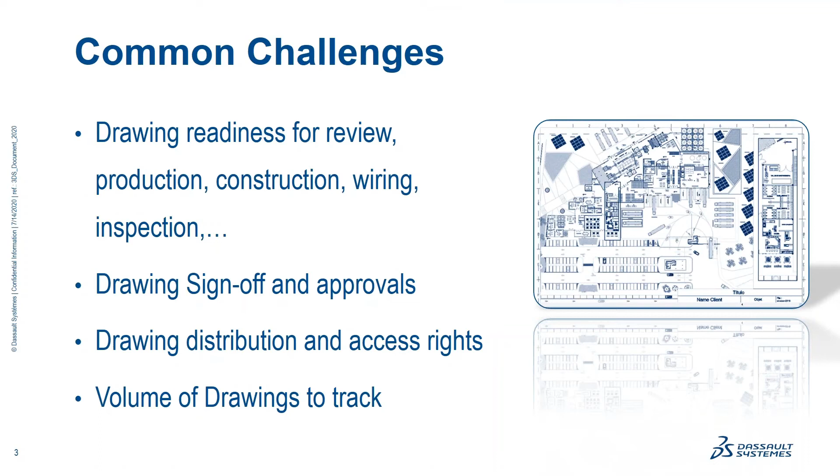And with that come processes that center around sign-off and approvals, as well as the distribution of drawings and associated access rights. And what we've learned over the years, being at the forefront of design tools and applications in the industry here at SolidWorks and Dassault Systèmes, is that the volume of drawings to track is, for most of our customers, pretty sizable. And that's a problem that we are attempting to solve. And with that, we're bringing together people across an organization, data, as well as it relates to design, some ideas.

And our 3DEXPERIENCE platform, a cloud solution, is uniquely positioned and purpose-built to make that happen, to bring together unstructured collaboration as well as structured collaboration methodologies where many people in an organization can come together and share information seamlessly through technologies such as cloud file sharing, similar to what you might be using today in some cases, but also combining that with the ability to dashboard information, to leverage communications through communities. That's all unstructured. And we have, as you'll see today, some solutions to offer to address some of the challenges that might come with that.

But with drawings, as it relates to sign-off and approvals, there's also a very structured element to it. And here we also will show you today some capabilities around lifecycle management of DWG design files, task management, all the way to project plans, and show you how you can leverage the two technologies here, Draftsight and 3DEXPERIENCE platform, to bring these two domains of data management and design in drawings nicely together.

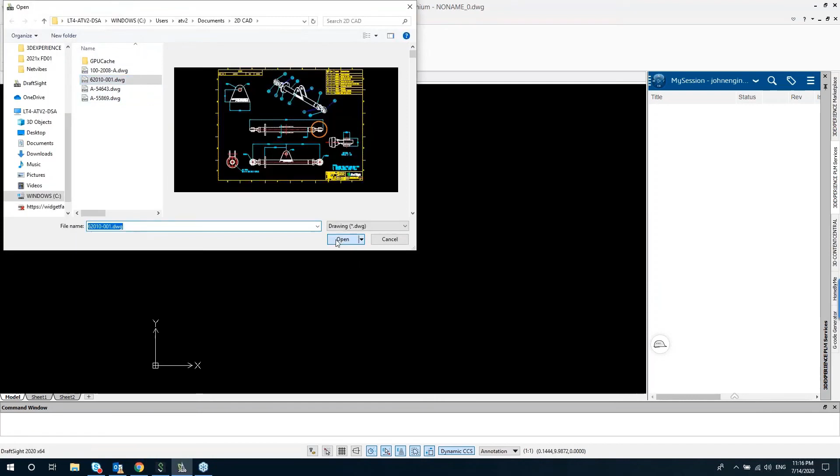Loaded beautifully in Draftsight. And now let's take a look at the 3DEXPERIENCE task pane on the right side of the screen. I'm going to expand it so it's a little bit easier to see for everyone. And here, as soon as we open a drawing in Draftsight, the platform is able to see and recognize that we're working on a particular drawing on a DWG.

Few things to point out. We can see what the title of the drawing is. We can see its current status. And in this case, currently it is not synced and not stored on the 3DEXPERIENCE platform. We can see which revision we're working on and if this is the latest version that's available on the cloud.

So to get started, the first thing that I'd like to do is show you the various options that are available when managing a drawing on the platform. So of course, if you have a drawing saved, you can open it directly from the platform into Draftsight. We can save it, which we'll do in a moment. We can also reserve it to make sure that no one else is working on a drawing that we are working on. And as soon as we finish making any changes, we can unreserve it.

We can make sure we're working on the latest copy by reloading it from the server and also replacing it by a revision if we're working on a different one. We can control the maturity of a drawing and create a new revision of this specific drawing directly through the Draftsight interface. So first, let's save the drawing so it's available on the platform.

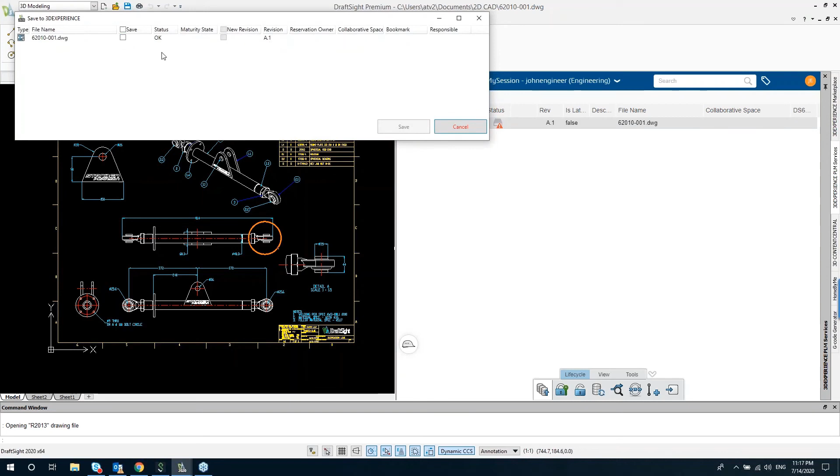We can verify that the status of the drawing is okay. We're saving revision A1. We'll check and click Save. The drawing is automatically saved and uploaded to the platform and available to all other users. We can see that the status of the drawing has been updated automatically, and the drawing is currently not reserved, so it's available for anyone else on the engineering team to open in Draftsight and start to work on it.

Now, I'd like to review what maturity state this specific drawing is in. So by right-clicking and going to maturity, we can see what state this drawing is in. And this is the workflow that's available by default, but it can be customized to suit your specific needs. So currently, the drawing is in work. We can freeze it, or we can release it if we have finished making changes to this drawing. So let's release it.

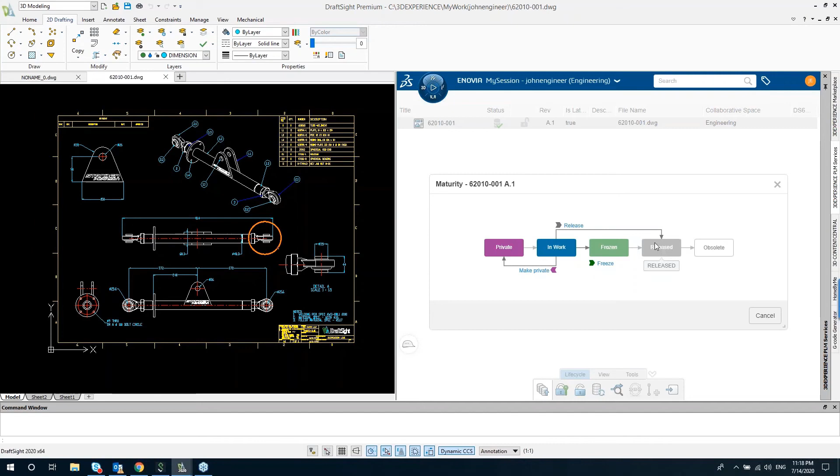By simply clicking, the drawing is automatically released. We'll get a notification that the maturity of this particular drawing has been updated, and this is the latest version being saved to the 3DEXPERIENCE platform.

Now, what happens if we make a change to a released drawing? So really quickly, I'll go into Draftsight and I'll just change one of the colors for the layers that I have. So we'll choose the dimensions. Currently they're cyan. We will change them to green. I'll save this locally.

And as soon as we've changed the drawing and saved it locally, you'll notice that the status has changed because now we are not working on the latest version of the drawing that has been saved to the 3DEXPERIENCE platform. So we'd like to save our new version, the one with the green dimensions, to the platform.

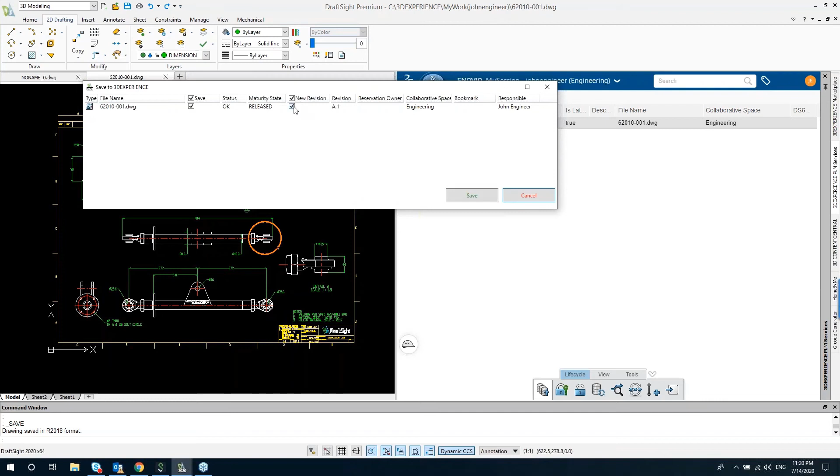Now, one thing to note, I already released the A1 revision. It was not in an in-work state, so I can't overwrite it, but I'm able to automatically create a new revision so that everyone else can see that I've made a change without affecting the released version. So by selecting new revision, I'm able to save and synchronize this to the platform. It's automatically updated.

And the status is green, and we'll notice that a new revision is automatically created for us, in this case B1, and the drawing is available to the team. If we ever want to revert and go back to A1, to the first revision that was available, simply right-clicking, we can use the Replace by Revision option.

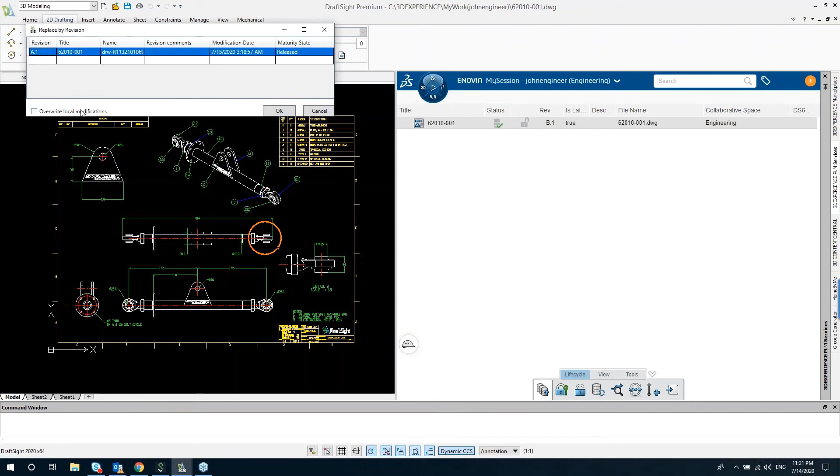And we're able to see what revisions are available. So let's select A1. We'll overwrite any of the changes that I've made and come back to our original drawing.

So this is a simple example of how we can manage our drawings directly from Draftsight and from our desktop into the cloud so that it's available to everyone. We can create new revisions automatically and not have to waste time emailing or chasing down the latest versions of any drawing. But we can go a step beyond that. We can collaborate and manage and assign tasks.

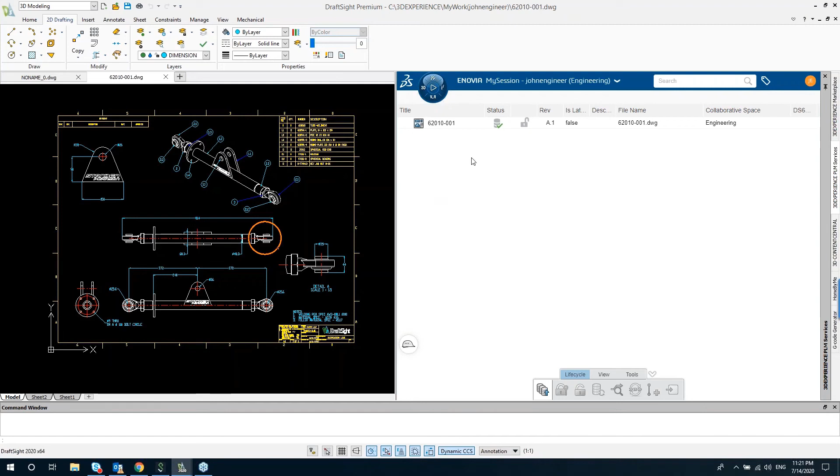So there are additional apps and roles available on the platform, and I'll take a quick look into the Collaborative Tasks app, which is an application that allows a manager to assign a task to his team, attach any deliverables, and we can work directly through Draftsight. So I've been assigned a task of finishing a drawing. Currently, it is in a to-do state, and I can also see that there's an attachment for this task.

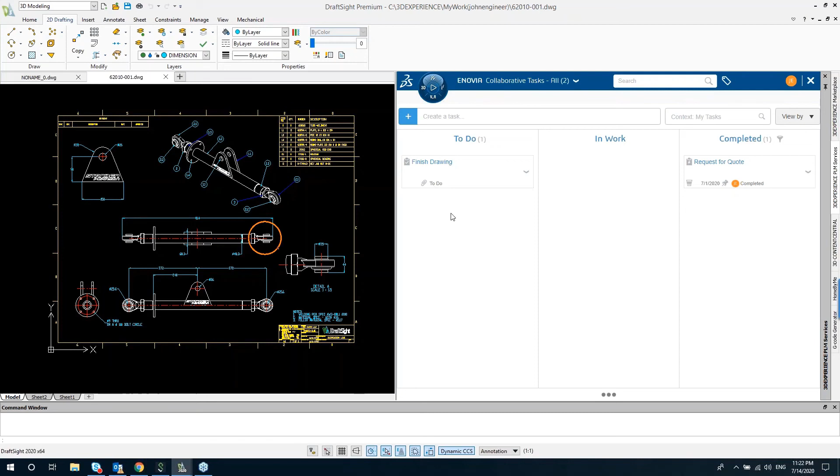I'd like to start working on it. So first, I'll move this task into the in-work state. I'll open the task. So the requirement is to change the dimensions to red. It's currently in work, and I can see which drawing I'm supposed to work on. So let's open that drawing directly inside of DraftSight.

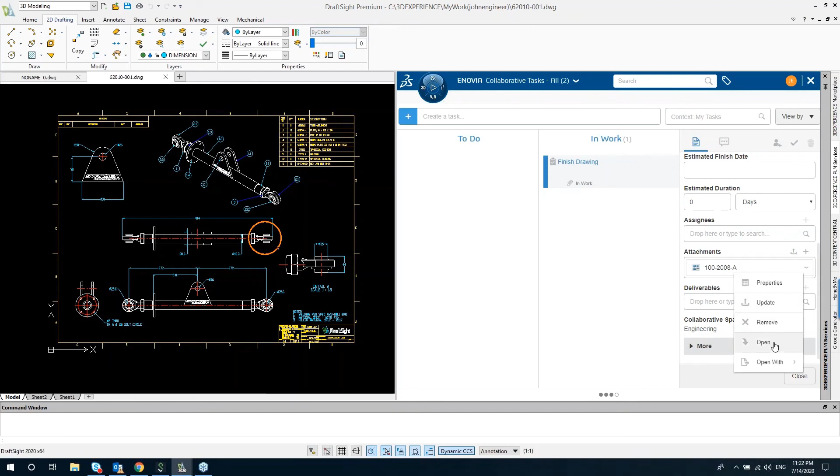So as soon as I click open, it's going to get the drawing from the 3DEXPERIENCE platform and open it directly inside of DraftSight. I'll go back to my session to make sure that I'm working on the correct revision.

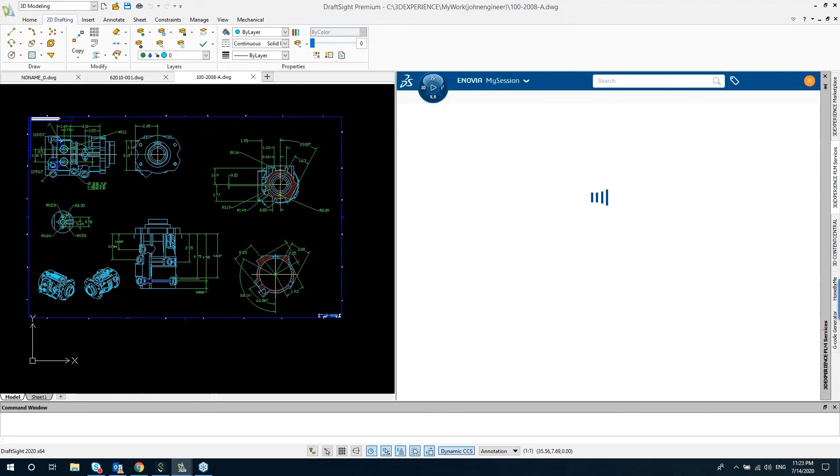Make sure it's saved locally as well. And we can see that because I've made a change, the drawing has not been synced to the platform. Also, I'd like to reserve it to make sure I'm the only one who has access to it at this time. And you'll notice that as soon as a drawing is reserved, you'll get this little green key icon to show that you're the only one who can access and work on the drawing at a given time.

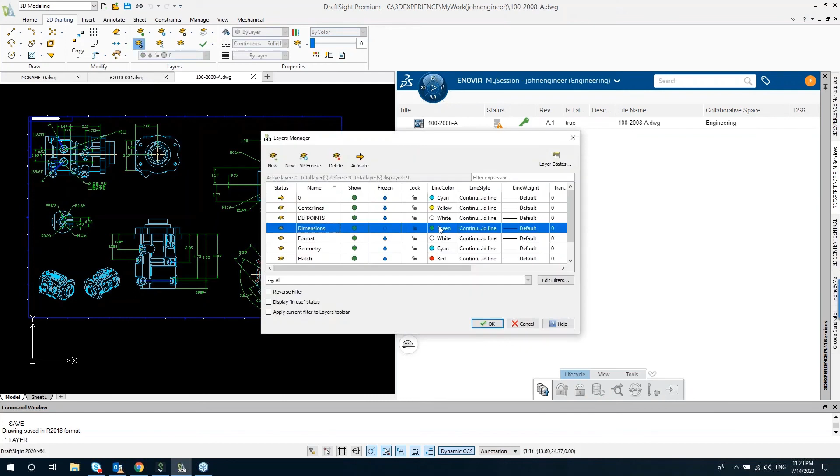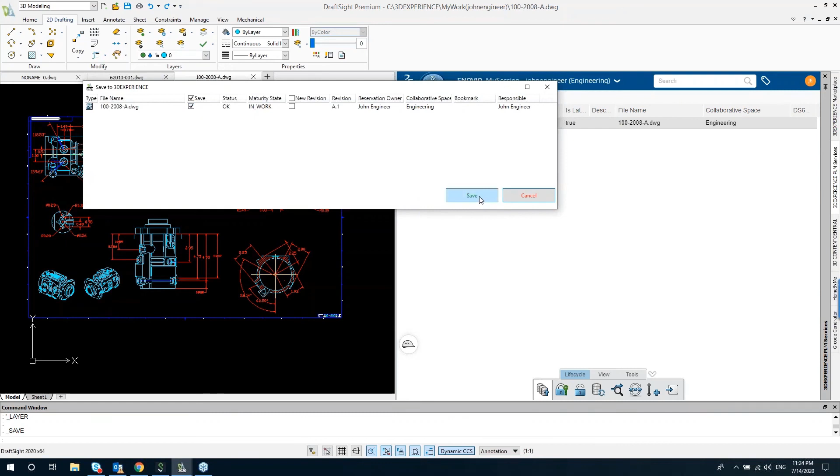Now we'll make a change. So we'll make the dimensions red as requested. We'll save it here. And then make sure the latest version is updated to the platform. Now, the drawing is in in-work state. It hasn't been released. So we can override what's been stored in the cloud and click Save.

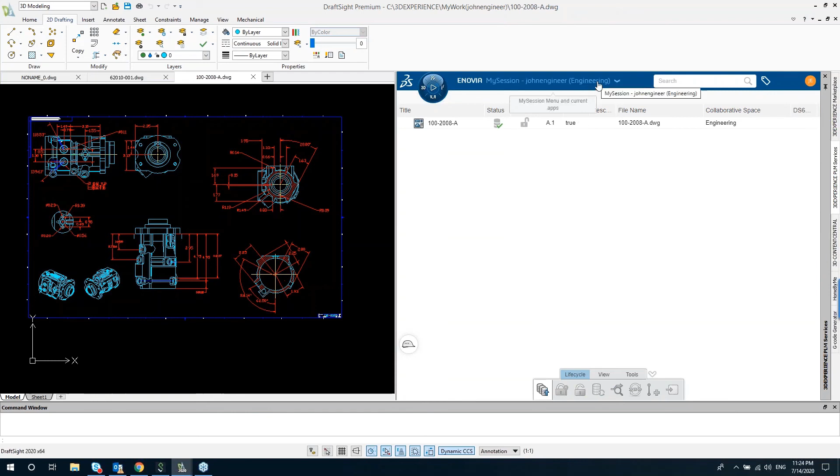The drawing has been updated, and we'll also unreserve it so that everyone else on the team can review it and make any additional changes if they've been assigned that task. The drawing has been unreserved. We're working with the latest version, so our job is complete. We'll go back to the collaborative tasks app, and we'll mark this task as complete.

All right. So we just looked at a way of leveraging the 3DEXPERIENCE platform beyond just managing a drawing. We can also assign tasks, add attachments to them for other engineers to complete, make adjustments, assign deliverables, upload the latest versions, and complete our workflow. So let's actually take a look at the 3DEXPERIENCE platform.

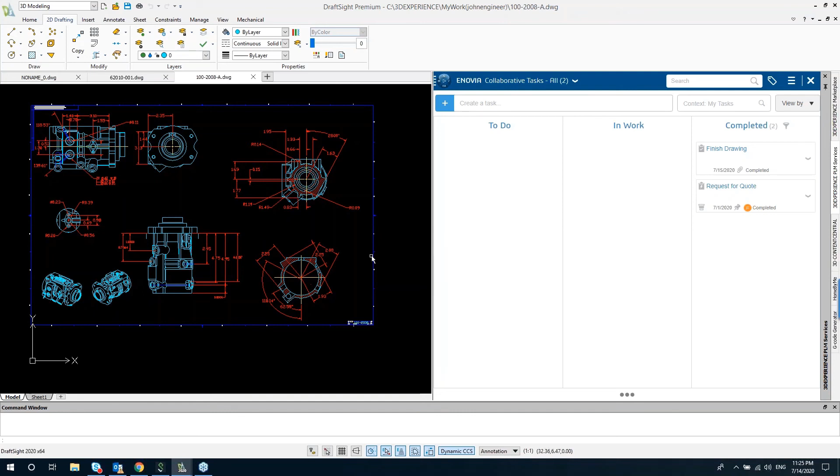So I'll jump over into my browser, into Google Chrome, and I'm able to access the same functionality that's available in the task pane inside of DraftSight. And I can see the drawings, I can track the life cycle, and I can also see my tasks in one single view. So first, I'd like to review the drawing that I was just working on a minute ago, and I'd like to see what state it's in.

By dragging it into the Collaborative Lifecycle app, I can see that this was revision A1. It was modified about a minute ago by us when we updated and saved it to the platform. And now we'd like to release the drawing. It's automatically been updated. If it ever becomes obsolete, we can make additional changes. We can send it back to the in-work state.

And this is just working with drawings. We can also create revisions directly on the fly inside of our browser, inside of the platform, and we can go a step beyond that. So let's take a look at some of the other applications that are available on the platform that help us get our job done. So let's jump over into the project management task.

So we can create projects to track our tasks so that we're working in a much more organized way and in a workflow that's suitable for our team. And this is not limited to just engineering. We can have projects for the finance department, for sales, for product management, for any group, team, or department in an organization. But we'll stick to engineering for now.

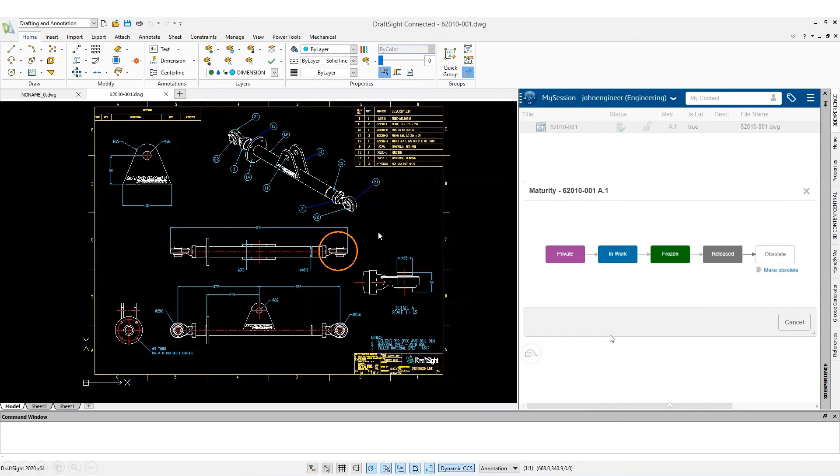So just to recap, Draftsight integrated with the 3DEXPERIENCE platform, enabling solutions around common challenges: drawing sign-off, approvals, visualization in terms of drawing readiness, distribution, access rights. And it is not limited in any way, shape, or form in terms of the volume of drawings your organizations may have.

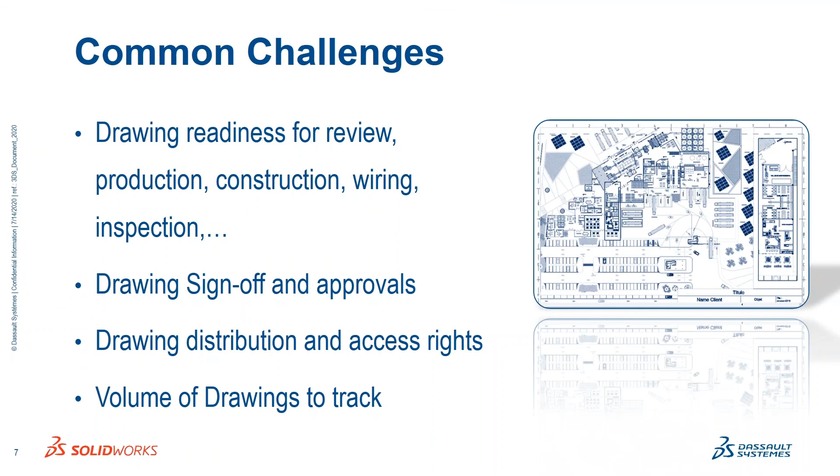Draftsight is a professional grade 2D, 3D CAD solution. With it, you can create, edit, view, or mark up any kind of DWG design file, and move effortlessly back and forth between 2D and 3D. It's part of the SolidWorks Dassault Systèmes portfolio, backed by a very large R&D organization.

With the integration with the 3DEXPERIENCE platform, we're now bringing you drawing data management. We're helping our clients make sure mission-critical drawings and documents are never lost. They're stored in the cloud on the Dassault Systèmes 3DEXPERIENCE platform. With it, we're able to reduce errors by providing team members access to the intellectual property that is such a vital part of your overall operations.

And we're also making sure you're always working on the most current drawing and its revision, all coming from a single source of truth that is accessible to everybody within the organization.

We've coupled it with project management, a vital part of the overall process many of our clients execute, where drawings are part of deliverables, part of milestones, and executing on these plans rapidly and effortlessly in a team environment is critical for many companies today, breaking down the information barriers and silos that still exist.